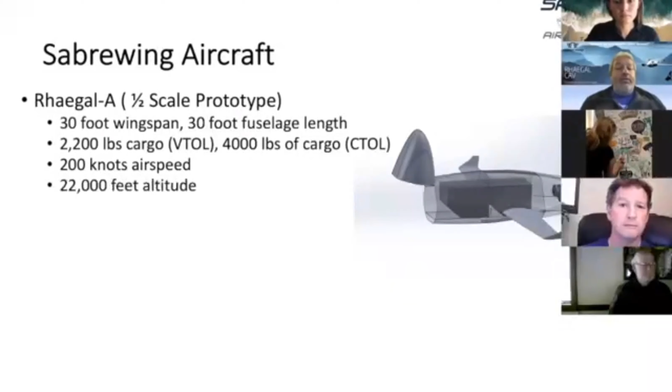I want to offer my congratulations to Dr. Roper and his team for achieving this revolutionary rapid contracting and prototyping method to bring industry and DoD together to develop this new exciting technology with both military and civilian applications.

This technology will have great benefit to the needs that we have in Alaska and the Arctic, where conventional aircraft, vehicles, and vessels oftentimes can't operate.

Agility Prime is part of our Defense Department's long history of turning futuristic ideas into reality. I'm proud that the federal government is investing in revolutionary ideas. Agility Prime is leading the way.

This launch of Agility Prime is so exciting. This technology has the potential to make vertical flight more affordable and more widely available.

And with the encouragement of the U.S. Air Force and the entire federal government, American companies employing American workers can gain a head start and win a fair share of this lucrative market.

eVTOLs have the same agile, vertical takeoff and landing capability as helicopters, but are quieter and should cost much less to operate because of their electric motors.

We are becoming a trusted innovation partner in commercial tech. I could not be prouder of this initiative. I could not be prouder of this team.

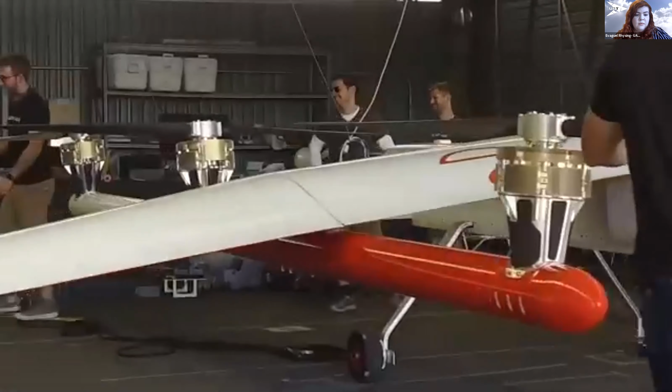And it's truly a great credit to Agility Prime. They could put on this virtual event with so many hometowns of the United States represented.

You know, industrial base is not really about just what a country can make. More than that, it's about the people who dream up what to make. And then, of course, those people who make it.

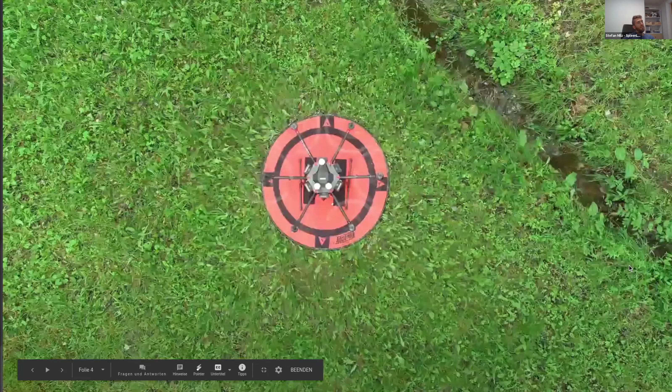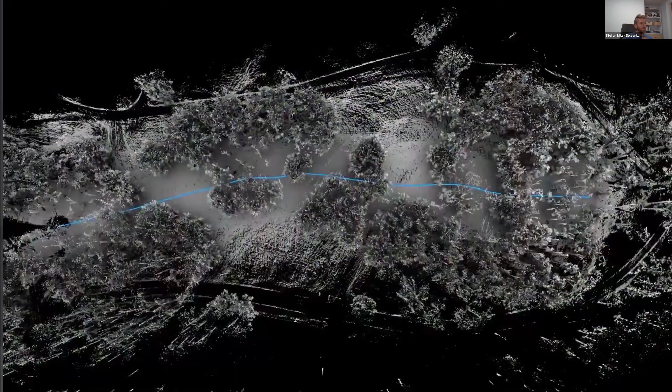So how could this look like? Let's have a look at this small video of how a drone in real time reacts to its environment, fully automated. It's done with a combination of AI and traditional deterministic algorithms, and it directly looks for a path that is not hitting an obstacle in real time. It's flying very fast, creating a map, and self-localizing without the use of GPS. This is how an AI function could look like on a drone, and it's very impressive and very accurate. At the end you see a really nice 3D map. This is just a specific function for starting into that game.

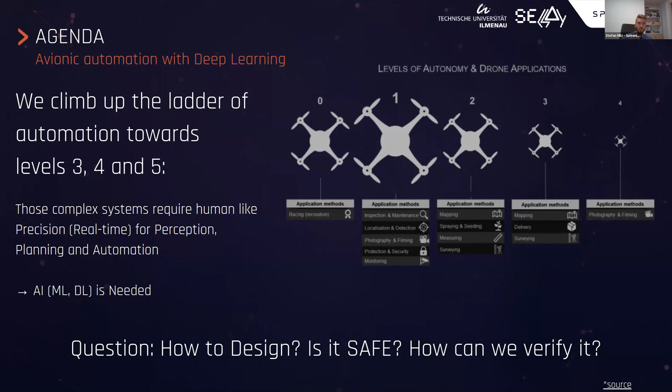So what is autonomy? We have several levels of automation, and as we climb higher, the tasks get more and more complex, so we need AI. But the main question at the moment is how can we design a system composed of functions solved with AI that is also safe? Not safe from a functional or objective point of view, but really from a point of view that covers reference standards, for example DO-178 or something like that.

Therefore we need some key assets, and I'm really confident that Spleenlab brings that asset. We need deep machine learning and autonomy know-how, and more importantly, a confident knowledge of sensors and the physics of sensors, and a safety strategy regarding the reference standards. Overall, we designed an architecture to solve the full autonomy approach, but we can also pick up single modules and bring them to the ecosystem.

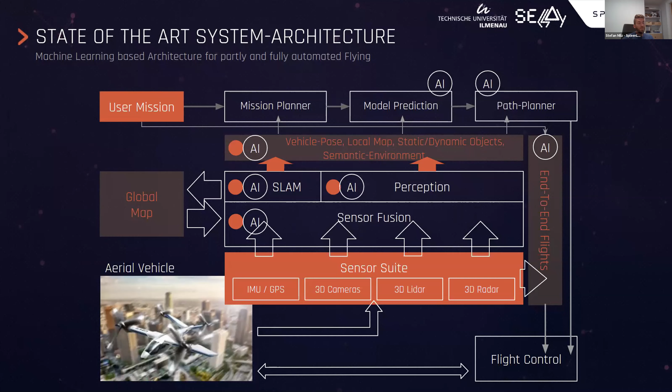At the moment, we believe in a modularized system composed of different sensors, which is really important, sensor fusion, perception, SLAM, and also model prediction, path planning, and so on. We see at the moment that perception, for example like detect and avoid, or SLAM as a GNSS-denied localization, is very interesting for the ecosystem.

So why is that safe? On one hand, the modularization keeps the single modules encapsulated. On the other hand, redundancy makes it more stable. The modularization allows us to really test modules in an encapsulated way, and this is really required by the big reference standards, as is the redundancy. This is really important to fulfill the higher automation levels.

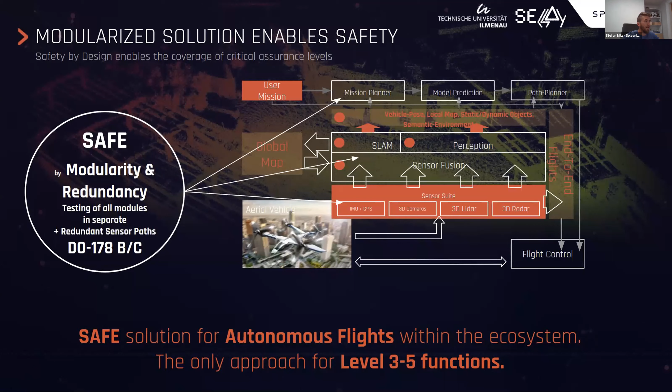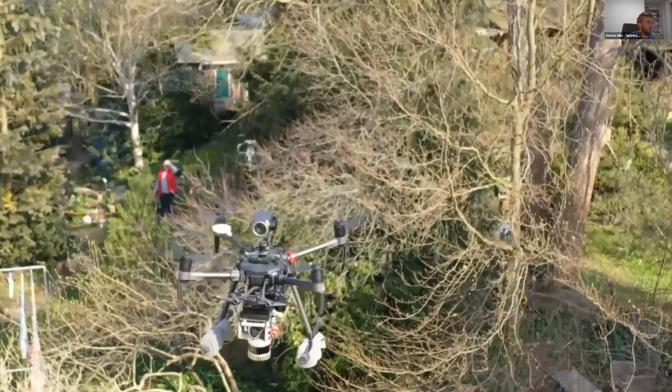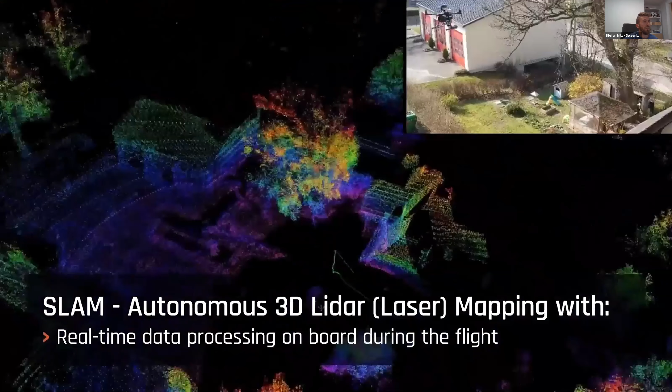It's fully GPS-free, only using its perception and mapping, the SLAM approach, and inside that module we also use some machine learning components. But this is what redundancy means. So if you have a GPS and there's a GPS-denied zone, it's always good to have redundancy, and that's important for all the functions in the full autonomy system architecture.

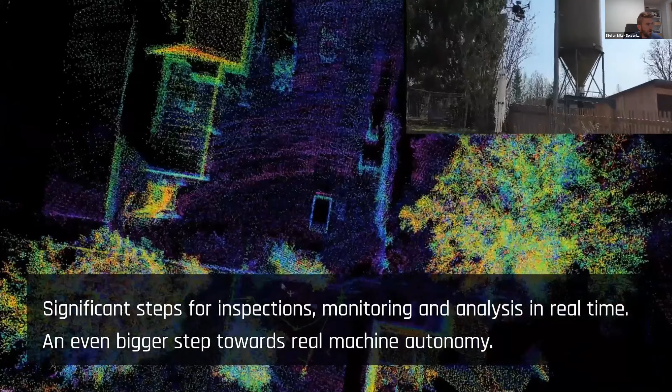And when it comes to deep learning, it's all around us, it's very famous, and everyone wants to do AI. So we have to ask ourselves: what is deep learning AI, really?

At the end, and this is really important for safety, it's a statistical procedure to solve functions. This means we don't have determinism inside. And when it comes to reference standards, they require us to provide determinism. This is really, really hard to solve.

So there are other procedures needed. You cannot put a full autonomy function only on ML at the moment; it's not possible to validate because of the huge need for data. You need a kind of safety-by-design paradigm: sensor analysis, sensor redundancy, and separation of processing chains. I want to explain this later, but first, why is sensor redundancy important?

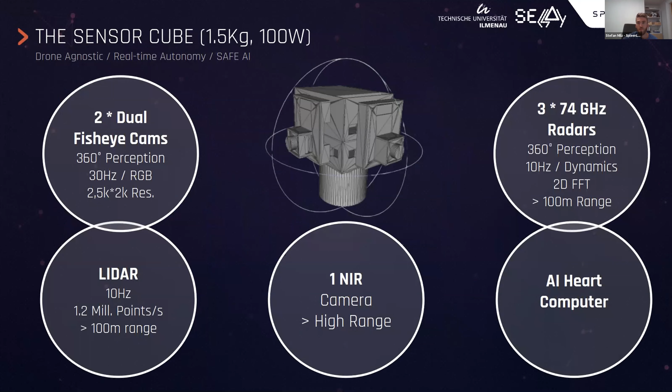And we developed a sensor cube composed of several sensors. It's low weight, with an AI computer inside, and you can plug and play it into different devices. That's how it looks, and this is how it performs.

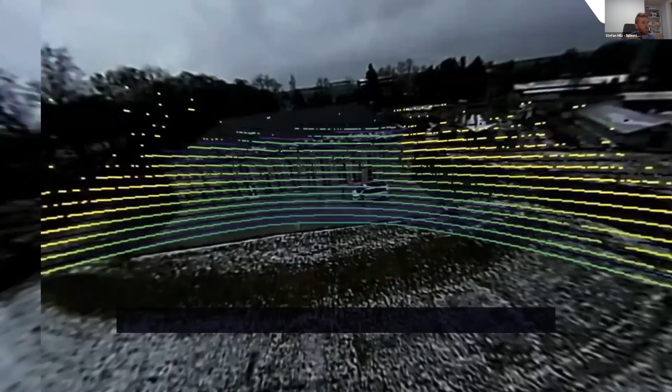So here we have environmental perception using camera vision, fully 360 degrees with dual fisheye cameras. We have the LiDAR—here it's a low resolution LiDAR, we're moving now to higher resolutions. We have the semantics, and we also have the full sensor fusion. The environmental model is then the result, with real semantics in a real-time map provided during the automated flight.

Some remarks: we also made third rank at the most important AI conference in Europe, in the Game of Drones competition, with software-in-the-loop automated flying, out of 120 competitors.

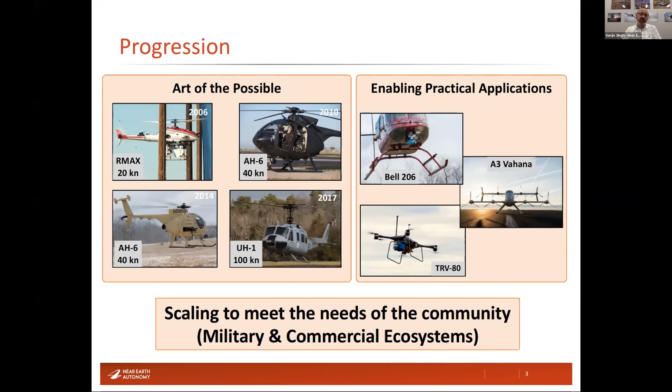I'll try to give you an example. Our current work is with Kaman Aerospace to bring autonomy to their helicopter, called the K-MAX. This is a very interesting helicopter with a long history of commercial applications, able to lift about 5,000 to 6,000 pounds at a time. It was developed initially to help in forestry applications, using a sling load to pull out very heavy objects, also used in construction of highways and other places where large members need to be installed in rugged terrain.

What we're doing is trying to see if we can use this aircraft in an autonomous fashion in a military ConOps for logistics especially. The Marines are very interested in using aircraft for transportation, and what we're looking at is all the lessons we've learned boiled down into a small package that can give this kind of aircraft situational awareness and allow it to operate in an area where all sorts of unplanned things might happen.

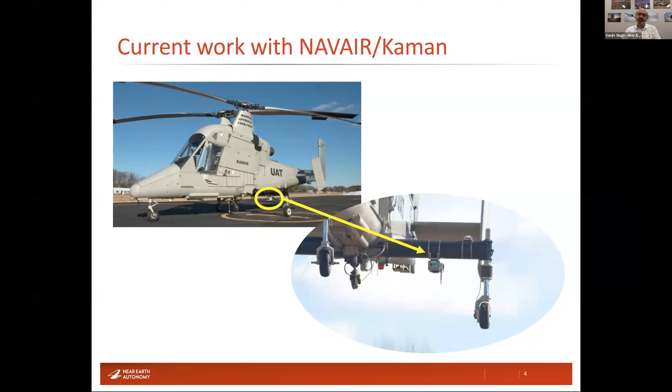We've been thinking about what we call the military ecosystem, which has to do with everything that needs to happen to fly these aircraft safely - starting even before the aircraft is up in the air, with all the mission planning that needs to happen, using information from any threat or no-fly zones that might exist, any terrain present in the area, and then the situational awareness needed to avoid static objects and flying objects. This includes being able to deal with contingencies as they come up, evaluate terrain if the vehicle is coming down in an emergency, land precisely with very lightweight infrastructure, and even land on ships.

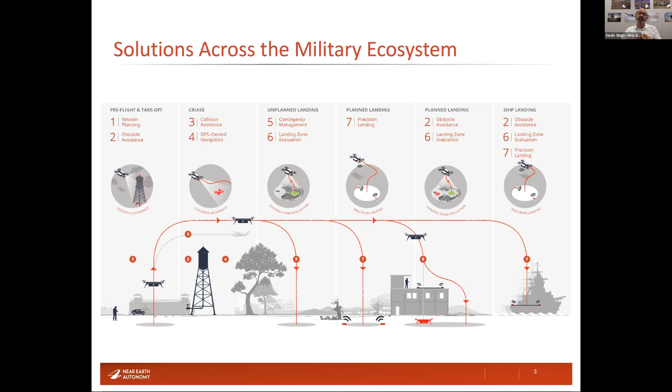I know there's a very strong case for aircraft to be able to fly from ship to shore, shore to ship, ship to ship. These are very important kinds of cases. So we're building these kinds of products and capabilities that are modular and can be put into various kinds of aircraft. We have also a very similar kind of need on the commercial side, and you can see that some of the details are different. In the commercial side, there's a more typical case of landing at a site that's been prepared for the aircraft to take off and land at.

But these aircraft have to be able to evaluate a landing site in case it's coming down in an emergency. We can't imagine that these aircraft will be perfect, or that they'll always be able to get to a prepared landing site. So if it has to come down, the idea would be that there would be a map ahead of time of all the places the vehicle could land, and then as it's coming down in real time, it would have to evaluate these landing sites to make sure it's landing safely.

And of course, just as well as in the military case, the commercial case also needs immunity to GPS dropout, jamming, or any of these other kinds of things. These are very different kinds of ConOps, but what we'd like to suggest is that there are some common needs that can be exploited across both military and commercial use cases.

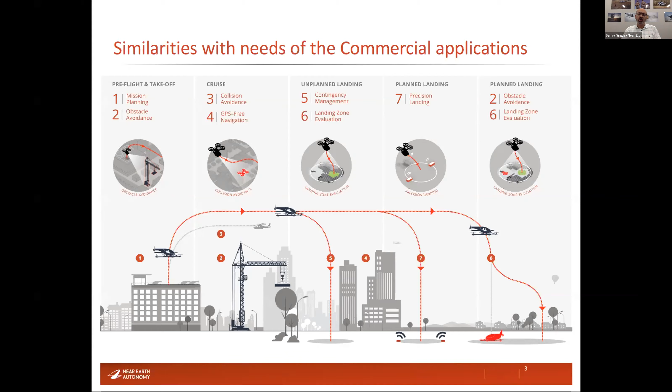So I'm going to stop here. That's my contact, sanjeev@nearearth.aero, and if we have a couple of minutes before time for others, happy to talk about this and anything else, especially if there are questions about the smaller scale, like the aircraft flying between the trees that Stefan showed.

Yeah, for sure, Sanjiv. Thanks for the presentation, a great overview. Leaning back on a previous presentation, can you speak a little bit on the difference in systems between something for a full-scale helicopter like the Cayman and something like a small drone? I know the weight fraction that the systems take up is much different, so maybe there's more opportunity for a larger airframe, but also more complication.

Yes, when you're flying on a full-scale aircraft like a full-scale helicopter, you're looking at the top speeds, and the flight profiles are quite different than what you would fly at a smaller scale. At a smaller scale, high speed might be 10 meters per second. Now that's very fast - that drone that Stefan showed flying through the forest is flying at 20 knots, and that's really fast when you're flying a few inches away. So all of what you need to do is make sure the vehicle stays safe.

Now, at full scale, if you're flying at 90 or 100 knots, which is a typical speed for a helicopter, you have to be able to look out further, and the approach angles are going to be very different. The takeoff procedures, when dealing with something like a full-scale helicopter, the flight dynamics are very different. A multi-rotor system has the ability to come down steeper glide slopes, but for a typical helicopter, we'll want shallower glide slopes, and that changes the perception system. Of course, larger systems are able to carry a larger payload with longer range LiDAR.

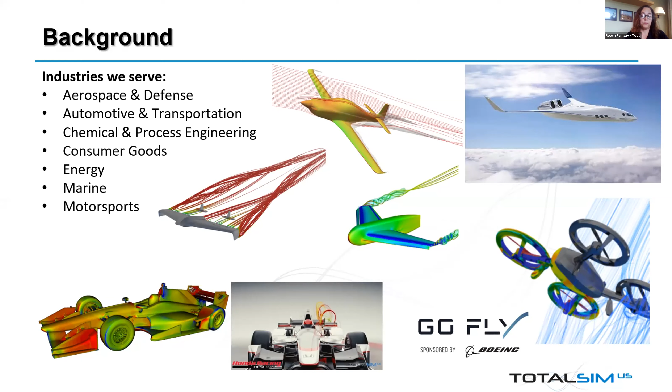Usually when people think of CFD, they focus on the solve part. However, there are many steps to get to the results you need. You need to prepare your geometry, create a volume mesh, then you get to solve, and then you need to post-process all the results so that you can actually review them and make changes depending on those results. In some cases, you'll go into shape optimization.

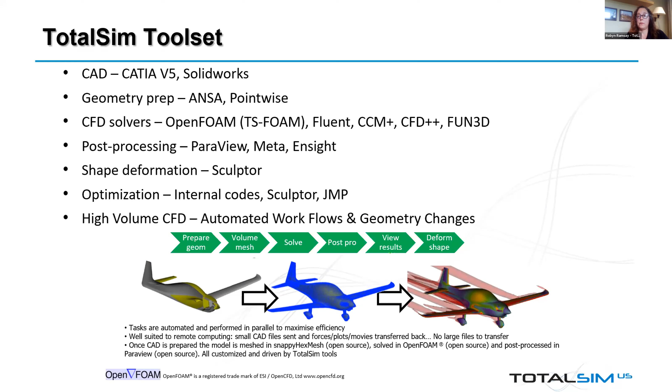Quality mesh prep is always important for obtaining quality CFD results. So ANSA, Star CCM Plus meshing, and Pointwise are the meshing tools that we tend to use in aerospace applications. What we like about them is that they can be interactive if needed, but they can also be scripted to allow for automation of more standard cases.

Some factors we think about when we are meshing are things like appropriate spacing near the wall, because it's needed if you want to resolve features like the location of boundary layer transition from laminar to turbulent or anything like that. You'll also want a high overall cell quality, and we'll probably need some refinement in areas where there'll be flow features that affect the overall lift and drag or performance of your aircraft or vehicle.

Our meshes are most often a hybrid mesh, of structured and unstructured cells. We also do modular volume meshing, and this method allows us to swap out parts without having to regenerate the entire volume mesh. It's a time savings for us.

So for example, if you have a flap or some other device that you want to try different versions of, then we would section off that part of the volume mesh so that we can just exchange that area of the mesh with the new part.

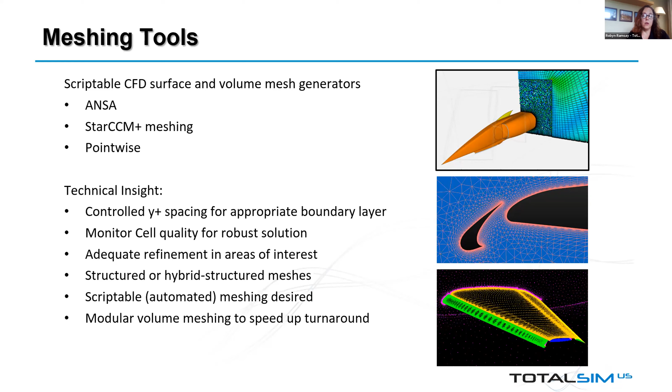The solvers that we currently use most are OpenFoam, and we like OpenFoam because it's open source, and we can pass any savings on to our customers. But often we're using Star CCM Plus for aerospace projects, as it has some additional features over OpenFoam, and it's well known and trusted in the aerospace market.

Sometimes we use FUN3D, which is also well known as the NASA code. In all of these codes, correlation is super important to us. So we often participate in correlation studies like the NASA-sponsored high lift prediction and drag prediction workshops, just to keep us connected to the state of the art.

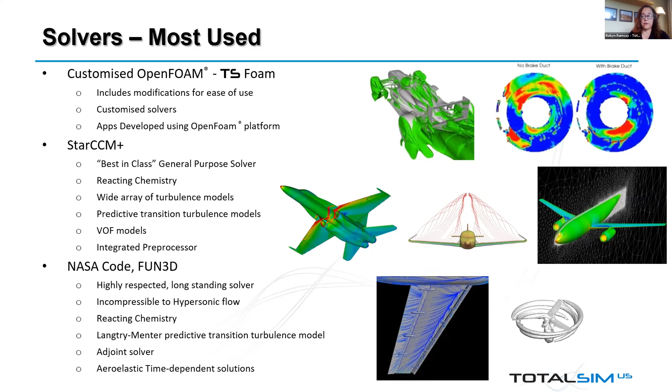Recently, we've been working with a client in eVTOL and have been refining our propeller simulation methods. What we found as a sponsor of GoFly is that often the external aerodynamics are the main focus by the teams, whereas the propeller is often taken off the shelf without a lot of analysis.

For a first order design, this will work for you. But as development continues on your vehicle, you'll probably want to do a higher order analysis where you can evaluate the propellers specifically and make sure they're delivering the thrust that you want.

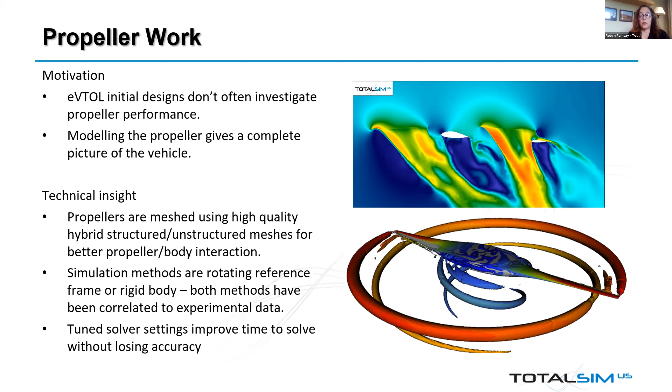As I've mentioned, automation is super important to us, and it's something that we do a lot of. We are always looking for ways to automate a process to improve our accuracy and save time. We do it for simulation setup as well as simulation post-processing. Automating allows you to spend less time manually creating plots and images of your results and more time analyzing your results, which in the end leads to better design.

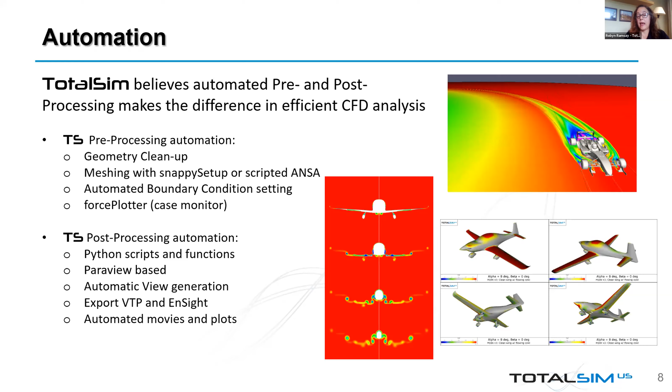In the Go Fly competition, we were super happy. Team Tetra was one of the winners in the February 2020 fly-off, and they used our TS Aero app. All these apps are developed for non-expert users and give advanced simulation results, and are priced on a run-by-run basis. This allows you to obtain quality CFD results without having to create an entire CFD department and incur the costs associated with that.

TotalSim has the ability to help no matter if you're just starting on the journey or if you're well into your development phase. The TS Aero app would allow for quick analysis of a single design, or if you're looking for more detailed analysis, TotalSim's experience in consulting services might be an option for you. My contact information is down on the bottom right. You can contact me through Ramsay at totalsim.us, or you can contact us through the TotalSim website at totalsim.com.

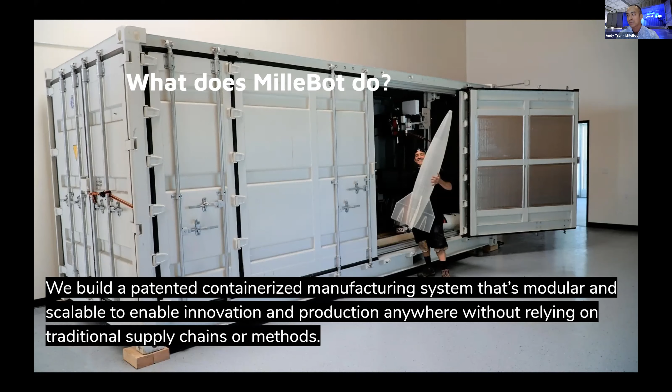So this is our MilleBot system - it's a turnkey system. This is not a render. Everything inside the machine is off the shelf, which means everything is modular. You can swap tools, upgrade your machine.

As the technology becomes better, as the hardware becomes better, as our OEM suppliers become better, we can upgrade the machines and give our customers enhanced capabilities so they can start producing with the latest technology - the greatest efficiencies. We have an onboard computer, which could be mounted to the system itself, or it can be controlled remotely through a hub or some sort of interface.

This is also the largest build volume per cost on the market. We've done our comparisons, and I'll go over an example with you later in the slides, how our machines are about 1/8 of the closest competition.

And of course, it is a mobile platform, which is very unique. That means you can deploy your manufacturing anywhere. So if your facilities are maybe in an area of wildfires, like right now in California, it's possible to relocate your facility to the next location or a different location that's safer so you can continue production, or maybe take it off site, to some stealth environment. So it's a very discreet platform.

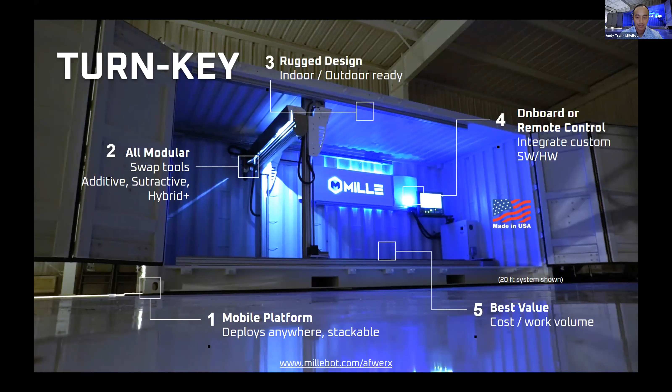So I'm sure you've seen this before, the shipping container - they're everywhere. If you have an independent testing facility or production facility, you can easily move your machines there. We have many configurations available, including 3D printers, 3-axis CNC routers, 5-axis routers, laser, plasma, water jets, 3D scanners, and more.

We're just going over a singular system now, but of course, as a company or organization scales using this platform, you can see the cost advantages - in one space, this is a 20-foot container you're looking at, 160 square feet of ground space, but if you can stack 6 units on top of each other, that's 6x production capacity in 1x production space.

So in the grand scheme of things, if you're lacking in space, a system like this will make a lot of sense. If you're designing for the factory, or if you can improve the factory, and you design around that, that's where I believe you can gain the most efficiencies, right?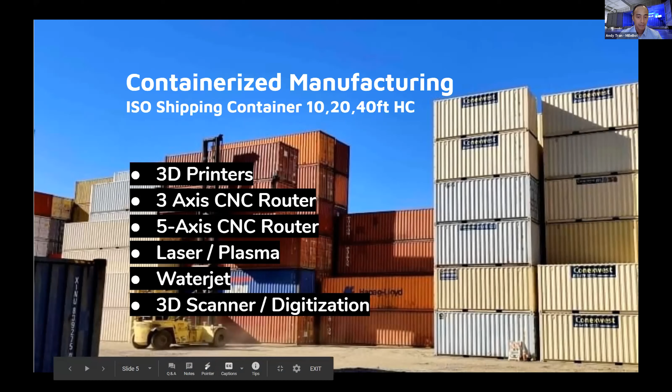So this all started with a vision. In 2011, I got into 3D printing. I thought it was the greatest thing ever, but I did realize there were some challenges with size, speed, and materials. In 2015, I had an epiphany, and that was combining the shipping container with 3D printing to create a large format system that I could produce and create these ideas that I'm sure one day I'd have. So that was the vision there.

So we built a solution, delivered in about 3 months. This is a commercial ready solution, and they're able to trim the carbon fiber skins for their aircraft. In addition to that, they're able to trim wings on the machine as well. So this machine serves multiple purposes.

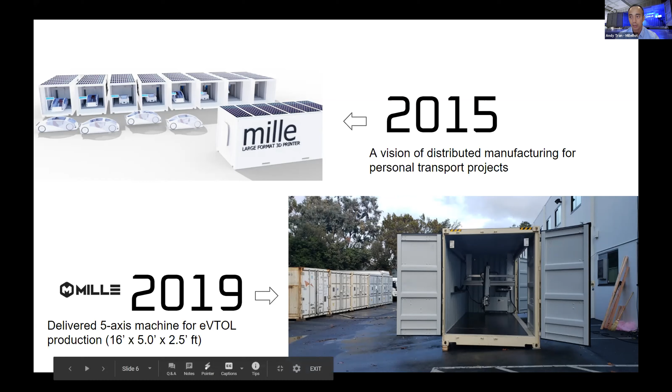And that's a small part—we can obviously produce much larger parts. On this 20-foot machine, you're looking at a build volume of 10 feet by 5.5 feet by 5 feet, and on a 40-foot system, that would go up about 2.5 times.

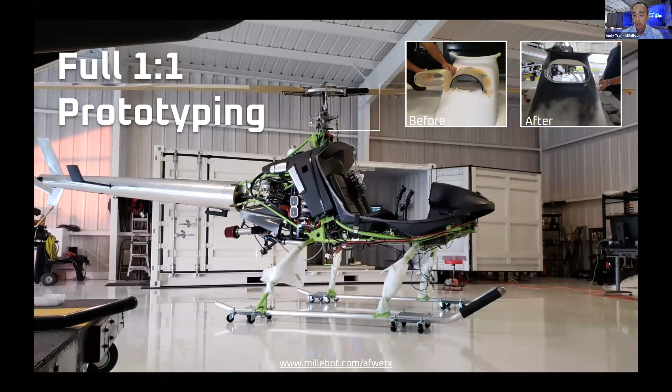But we've been able to reduce that down to about 8 minutes automatically using our system. In the same machine, we're able to trim 2 full wing structures simultaneously, measuring over 14.5 feet long by 2.5 feet, including drilling holes and creating cutouts for wiring and motors. This ultimately helps the company reduce time and cost of producing aircraft, so they can test, validate, and get to market faster.

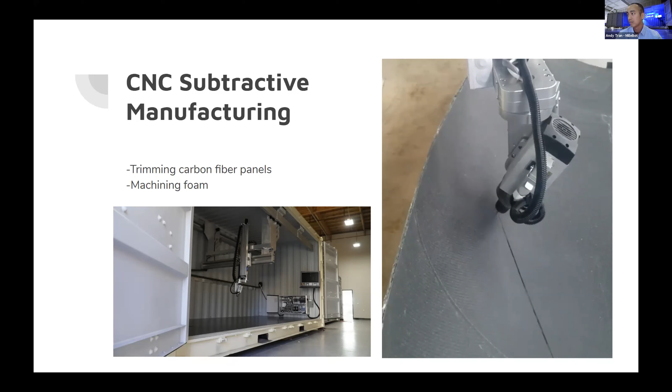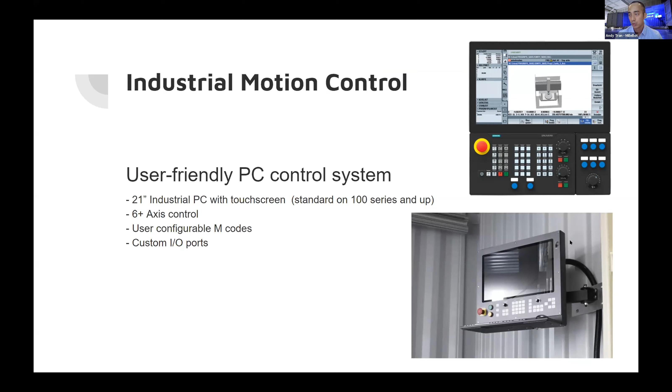We're always adding new OEMs to enhance our product line and give our customers more access and more options.

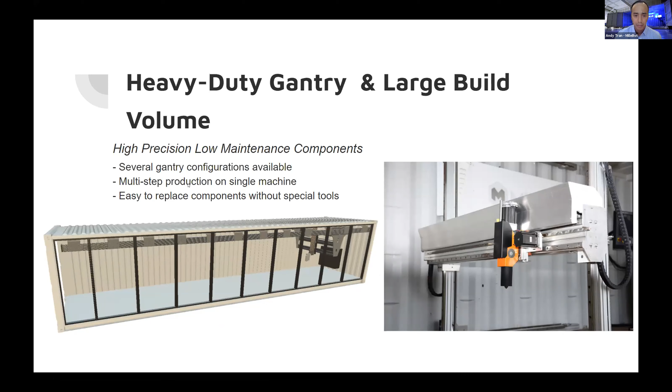This is an image of our 40-foot system on the left—what we call our 300 series, the heavy duty. It has a glass window in front so you can still see what's happening inside. On the right is a machine we have now, so you can see the components. It uses really heavy duty linear guides and ball bearing ball screws. Some of the wear and tear parts, like a bearing block, will last 10,000 kilometers and it's under $100 to replace. So very low maintenance, very heavy duty.

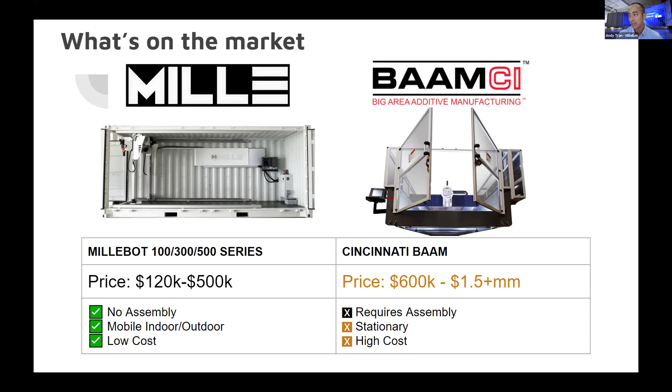On the next slide, this is a competitor's product—it's well over $1 million, plus it requires a stationary facility. Whereas a Millebot with a comparable build volume, we're looking at under $500,000, but really our 3D printers start at around 120 to 180,000. No assembly required, indoor or outdoor production, low cost, which means higher ROI and shorter time. We like to say agility, not facility.

In terms of materials, I'm sure you have questions about this on the 3D printing side. We are open source when it comes to materials, using off-the-shelf extruder systems. For example, the ones used at Oak Ridge National Lab that printed the Shelby Cobra—we can actually use that tool head, we've already spoken to the manufacturers, and it's compatible with our systems. Any other OEMs emerging or out there on the market, we can usually integrate into the Millebot platform to give you what you want.

So if you have any questions regarding any of our products—we don't build the aircrafts, but we help you build the machines that help you build the aircrafts.

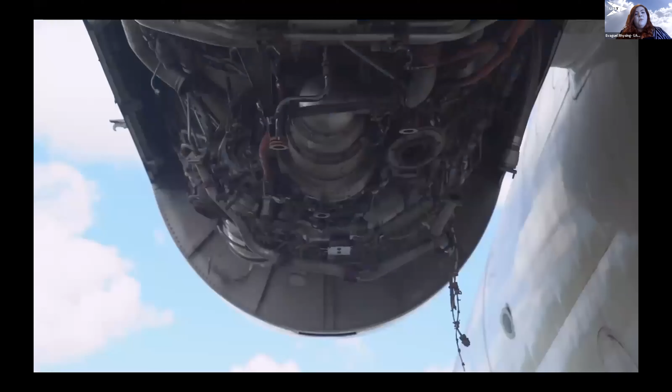Right now, as you can see, this is what mechanics have to see. They don't know what's behind the panels. And once they take off the panels, they have all this complexity. The red bands are metal clamps used today, different connectors and wiring. Of course, eVTOLs don't have this level of complexity, but they still have wiring and high voltage wire.

And the way they do maintenance is mostly visual inspection and locationing and actual physical inspection because there's so much. But this leads to human error because some things are not visible to the naked eye, and we're humans, we make mistakes. So what if we gave them the tools to be able to avoid this?

Now with UAT, this is an actual data set sample that we have from a temperature problem. With UAT, the mechanic now, instead of having to take all those panels and all that extra work, can use our platforms and augmented reality to be able to go inside and be able to monitor.

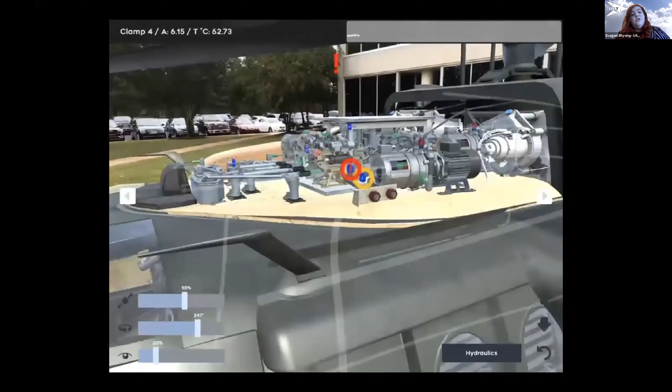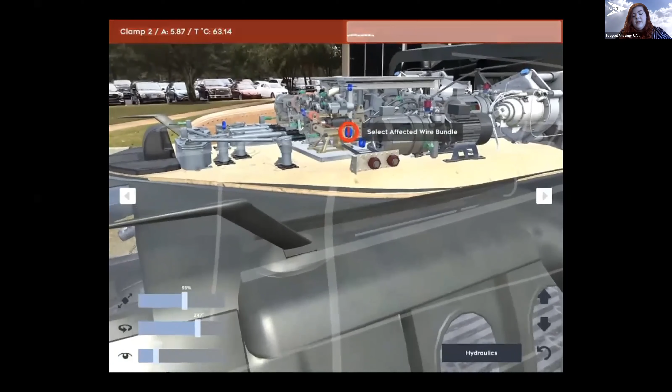In this case, the mechanic can see that it's a temperature problem, and it's not only telling you, hey, this is what's the problem, it's telling you where in the whole system it is and which wire it is, helping improve the process. Now the mechanic can make a very informed decision, go where it needs to go, fix it, and do the necessary steps to be able to avoid the problem.

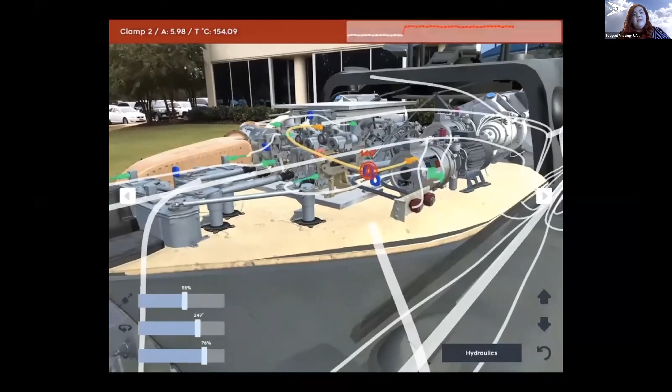And with all this data that they have, it will be able to tell you, you have X amount of time left before it becomes a real issue. So it provides an opportunity to do condition-based maintenance.

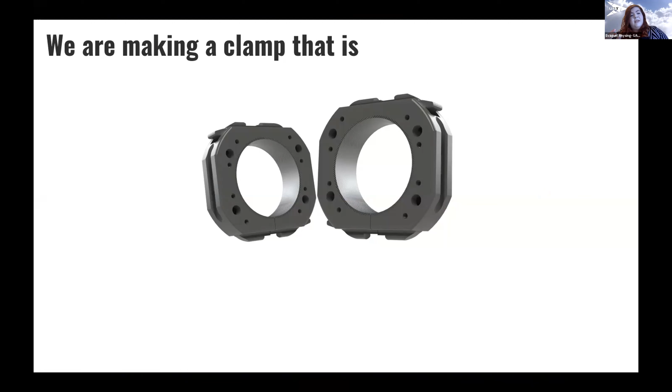So how are we doing this? We're doing this by replacing the metal clamp that most aerospace use today with a lightweight thermoplastic clamp that is faster, lighter, cheaper, smart, because it has a network of sensors embedded in it. As the first presenter said, that's made a good point for it. It has a complete set of sensors that help monitor and remove the redundancy for the electrical systems. And it uses augmented reality and artificial intelligence to do so.

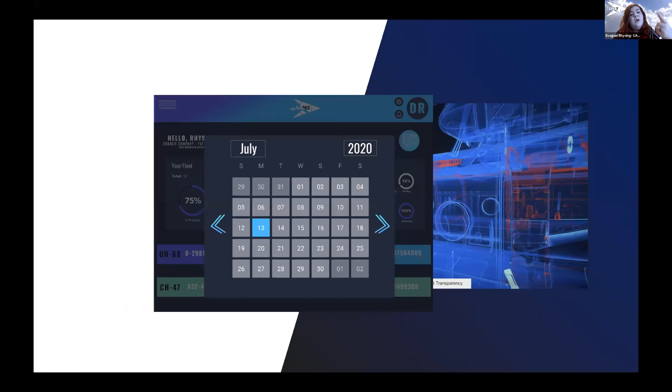And with this, what is helping it do, our system is not only, you can search by date, you can also search by timestamp, helping you make informed decisions and avoid maintenance that, if you have to do it, take from days down to hours or from hours down to minutes, because currently there's nothing out there that easily in situ will be able to tell you where a fault is located.

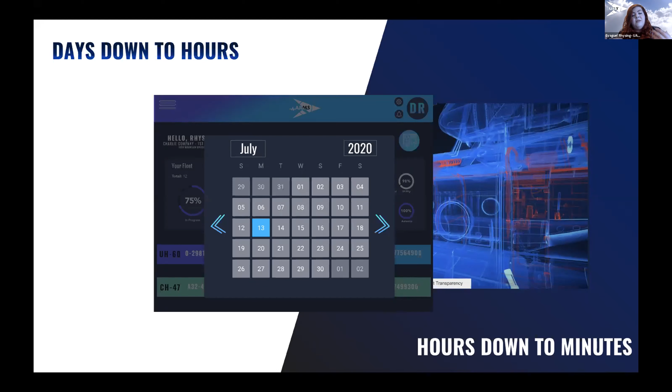And with us, as we explore the eVTOL market and as we continue to grow and all these amazing manufacturers create their models, and as they begin to age, we're going to learn a lot more about that wiring system, and having access to this data and the tools to analyze it, they'll be able to reiterate and improve upon their designs. And that's where we come in.

And not only that, of course, by monitoring as well. So a use case scenario is, here we install our clamp, we connect it to our software, and then we set out their threshold, meaning if you flip a switch off or you flip it on, it will not pick up any discrepancies. It will have a threshold.

And then after that, it is connected with a unique identifier on a one-way ask-receive basis. And what happens is you turn it on. When we turn it on, it's working.

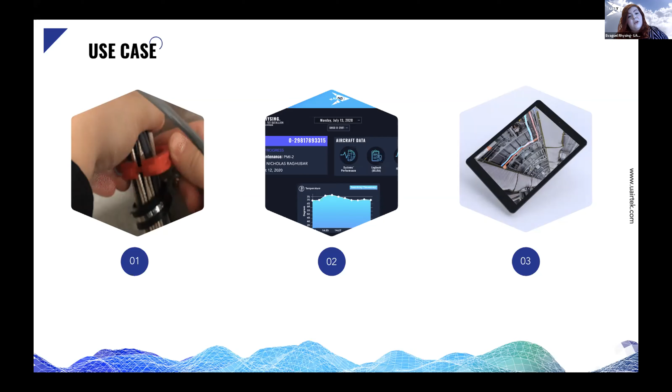Everything's fine. Visually we see nothing's happening, but our clamp picked up a problem. The problem picked up is a loss of amperage, but the system is still on because amperage is still flowing enough to turn it on, just not at full capacity. Because we can't see it, with the constant vibration of this aircraft, the wire shaved. If we do not pick it up early enough, this chafing will eventually lead to loss of power or other complications. But our clamp can help you avoid those.

And this is based on personal experience. Darian, the guy right in the middle, was an aircraft electrician for the US Army with over 12 years of experience in this field. He worked with these systems, understood the problem of troubleshooting them, until he got injured because of the metal clamps. This led to him losing his job, his home, everything. Then he created the ICC and created a solution.

Together with Donnie, we came together with him and created UAT. Donnie is a US Army captain, retired, with over 20 years of experience in technology development, and I myself have experience with business-to-government and business-to-business development for over 10 years.

So what does this mean for the eVTOL? Here you have this beautiful aircraft we've all seen for Agility Prime, built wonderfully. But once you put the panels in, some areas can be hard to access, and taking them off is very time consuming. As the aircraft continues flying and aging, this maintenance is going to become more difficult. But having eyes on board, you'll be able to tell, 'Hey, this seems to not be performing as it's supposed to,' and know exactly where to go instead of having to take everything off.

To give a little company overview, we have a manufacturing facility. We're ISO 9000 compliant. We've worked with the DoD before, with very experienced teams that have done projects for the Department of Defense, and we have the capability of producing over 1 million units per month.

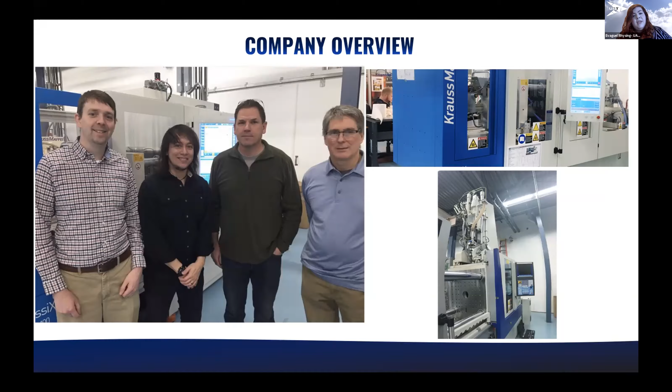On the development side, our team is aerospace focused, led by Gerardo. He was a prior senior engineer for electronic development and manufacturing at IBM, with over 20 years of experience, all the way to an AR lead who worked for NASA on development projects.

Our current status: the base model has passed testing based on mil spec, mil standards, so it's ready to go. On our sensing clamp, we've developed all the sensors, and currently we're putting them into a smaller printed circuit board so we can automate our manufacturing process, produce more efficiently, and start using them for larger scale testing and implementation.

So why are we here? We're here because we believe in what Agility Prime is doing and what all the manufacturers are doing. We believe urban mobility is the next step for human and urban transportation. We want to work with the manufacturers and help them through the design stage. Because of our open and integratable system, you can either use our UI/UX, or we can just give you the backend support. Because of our modular system, we can adapt to what each specific manufacturer needs. We'd like to continue working with them and with the Air Force and Agility Prime, as we have in the past, and keep moving forward.

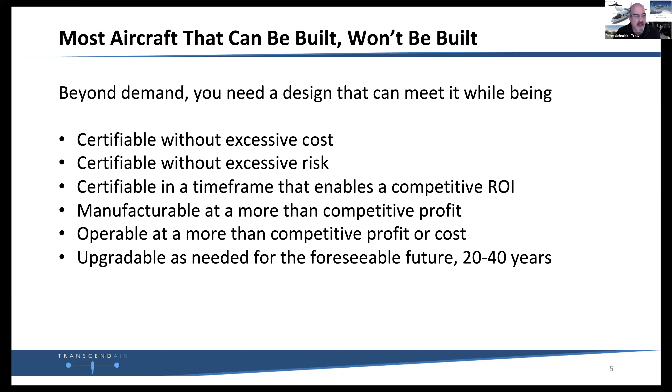Because beyond demand to bring an aircraft to market, you need a design that can meet it while being certifiable without excessive cost, certifiable without excessive risk, certifiable in a time frame that enables a competitive return on investment, manufacturable at a more than competitive profit, or why would anybody want to build your aircraft instead of other things, operable at a more than competitive profit or cost to private owners, and upgradable as needed for the foreseeable future, which for an aircraft is 20 to 40 years.

It's hard. Worse yet, most aircraft that are certified profit someone else, if at all. And that's because if you're applying new technology to a new aircraft, that takes time and effort to get right. And that extra time and effort adds cost, it adds risk, and it impacts the ROI timelines. And so all of that is a negative, and it's one of the reasons why it's so hard to bring new aircraft to market.

So the next question we asked ourselves is, what if you don't want to go bankrupt and let someone else make all the money off your aircraft? So the answer we came up with is target already proven markets with a low risk, high technology readiness level design. That's our approach at Transcend.

So we've designed an aircraft that will fill two proven market needs - that's for VIP helicopters and regional airline service. It's manufacturable and certifiable today under current rules. It will be profitable for the manufacturer, which won't be us. We're going to run the airline. It's going to be profitable for the operator - that will be us. Should be liked and trusted by passengers, of course. And it has to enable lower prices for aircraft and fares.

And what Greg and I bring to this is an outsider's perspective, if you will. Greg really sort of brings the passenger's perspective, and I bring the Part 135 air carrier perspective. And I'll tell you, until I got into trying to make money with aircraft at this scale, I had a lot of false notions about how people think about and buy air travel. And I systematically disproved those notions over 5 years of attempts at Linear Air. We've brought that directly into the design of our business model as well as the aircraft.

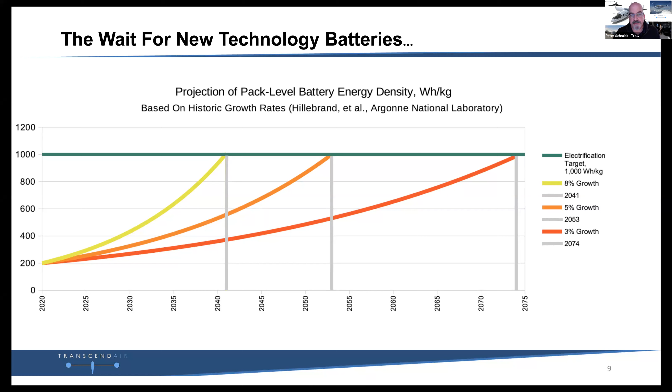I reckon today we're at about 200 watt hours per kilogram on a pack level, certifiable pack level basis. Pack level means with all the cooling, all of the shielding, all of the controls and everything necessary for safe operation in a certified aircraft. So if we progress at 8% per year, then we'll achieve 1,000 watt hours per kilogram, which is what our aircraft needs, in approximately 2041. So that's an issue. Now, if it takes longer than that, of course, it's much longer.

The opportunity cost of waiting that long is really high. So our approach is: the Vy 400, our aircraft, make money now and electrify the aircraft later. We've cleverly designed the aircraft so we can replace the jet engine and fuel tank with electric motors and batteries in the same locations, electrifying fielded aircraft using a supplementary type certificate once batteries get good enough. If that happens faster than these graphs suggest, great, we'll electrify sooner.

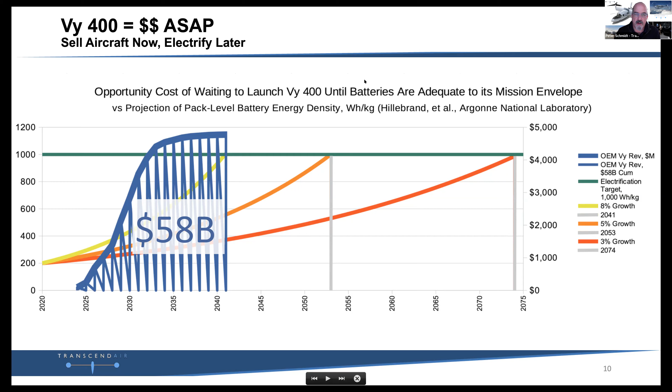That's perhaps a little bit of a controversial take in this world of eVTOLs, but as I said, we're a VTOL now and E later.

So why do we think our program is going to succeed? We're going after three markets, two of which are already proven. People buy helicopters today, about $4.5 billion a year, used for VIP transport. In addition, targeting regional airline service with our aircraft, we can offer cheaper door-to-door service than current Uber plus airline plus Uber costs by using VTOL. That generates an additional potential $9.6 billion a year in aircraft sales. Then there are military applications, which we've only started to think about, primarily because of AFWERX. Fortunately for us, the VIP market alone has the demand we need for our program.

Why would people buy our aircraft instead of a helicopter? Well, it's 24 times better: half the price, 3 times as fast, and a quarter of the operating cost per mile of a medium twin helicopter like an S-76 or Leonardo AW139. We really think of this as the world's fastest and most cost-effective helicopter. It's faster than turboprops and looks like one in airplane mode, but it doesn't have the range, so it doesn't compete effectively with fixed-wing turboprops. But it does have the range of a helicopter.

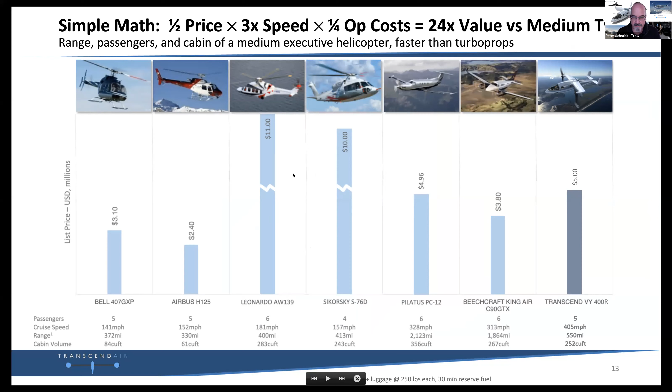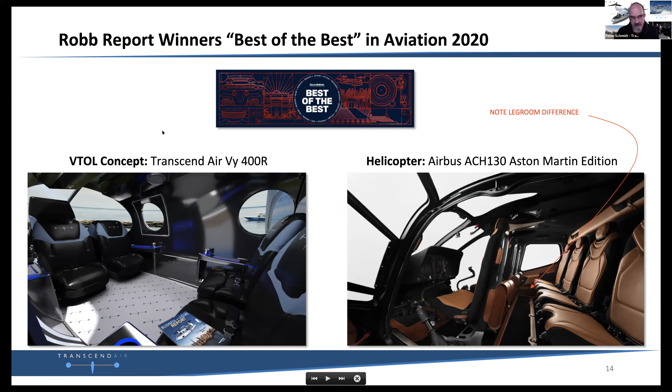A lot of people look at our aircraft and say, oh, tilt rotors, it's another tilt rotor like the V-22, that's really expensive and complicated. Well, it's not a tilt rotor, it's a tilt wing, and we don't use rotor heads. We use variable pitch propellers with collective in helicopter parlance, but no cyclic. Our motto is just say no to rotor heads. If you look at how complicated a rotor head is, they're amazing mechanical engineering marvels, and I'm in awe of the engineering prowess that Bell and others have developed. We're not doing that - we're going much simpler, with the same kind of propellers a King Air has. The result of that simplicity is much lower cost.

These aircraft are shown to scale, so you can see the Vy is much smaller than a V-22. It's coming in at $3.5 million in airliner trim versus $71 million for the V-22, and $24 million for the civil derivative, the AW609. The fundamental reason for that is just less complexity - it takes cost out throughout the entire lifespan of the program.

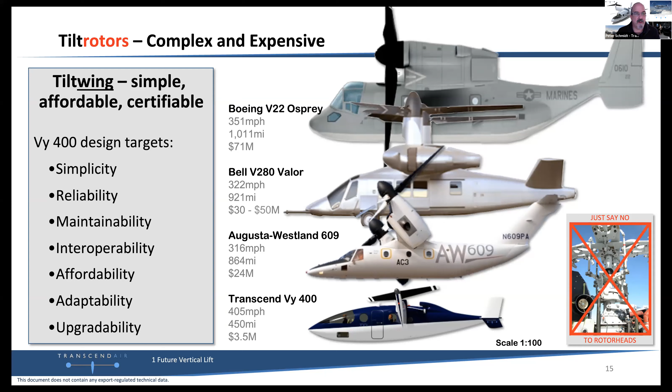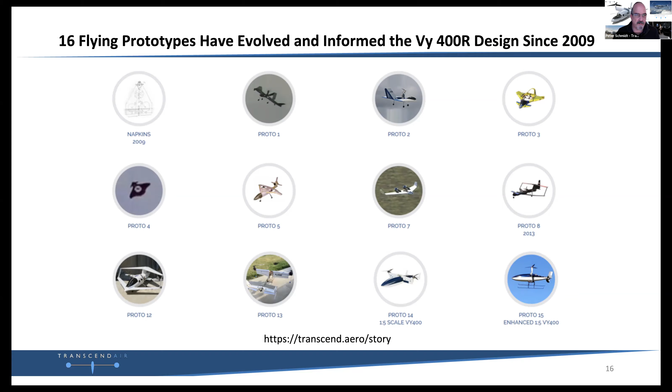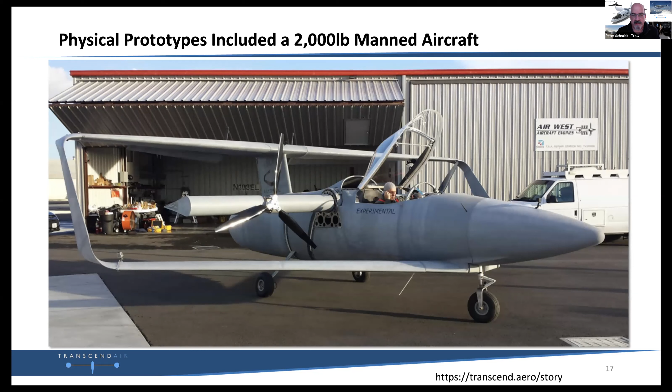We're not just about pretty renders. The lineage of our aircraft includes 16 flying prototypes that have informed the design since 2009. We've tried flying a lot of different VTOL configurations, and most of them don't work very well, so we're happy to have that experience that got us to the tilt wing configuration we're flying. One of the aircraft we built was a 2,000-pound manned aircraft, which was a really good lesson in flight test, safety, and building larger vehicles. That one wasn't electric - it had a supercharged Hayabusa motorcycle engine.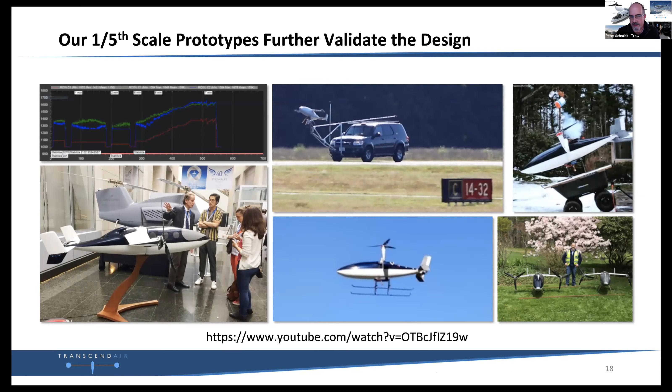We're currently flying a couple of 1/5 scale prototypes to further validate our design, acting as flight dynamics and flight control system laboratories that support our other analysis and simulation methods. So the Vy 400 has proven technology put together in a new way to create a disruptive aircraft. Some of the other specs: it's very fast - this is not an orb floating from building to building, this is a bullet going 352 knots, over 400 miles an hour, from city to city regionally.

It'll climb at 4,700 feet per minute plus in helicopter mode. That's 3 times faster than fully loaded twin helicopters can go. It'll climb at over 8,000 feet per minute in airplane mode. It's fuel efficient. It uses half the fuel per mile or kilometer of an OH-58D, the Kiowa Warrior.

It's very simple. This is part of the lack of complexity. We don't have any hydraulics. It is all fly-by-wire. I talked about it being tilt wing, not tilt rotor, and it has one single turbine engine, which we can do because it also has a whole airframe parachute.

Affordable, 3.5 million airliner trim. Effective. Sanjeev mentioned the autonomous command K-MAX helicopter that they're working on. That's had great success with the Marines. If you run the numbers, an autonomous Vy can deliver about 33% more cargo per hour than a KMAX can. So that's speed versus slung payload. And as I mentioned, it's future-proof. It's turbine mechanical to start, but the fleet is field convertible to electric.

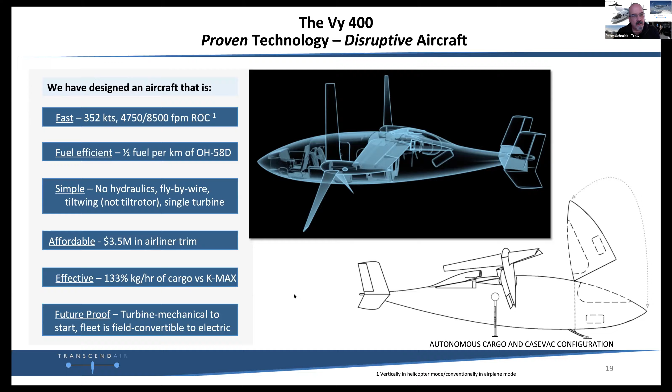So the summary here is VTOL now, E when batteries are ready, and we look forward to that great and glorious day. And I look forward to seeing it in Air Force low-vis gray at some point too. So with that, I'll pause in the presentation, just to see if there are any questions.

Yeah, for sure, Peter. I know we're coming to the end of the webinar here, so I'm going to move us along quickly, but thanks for coming on. Always great to hear from you, and best of luck with your continued progress there. Oh, my pleasure, Sterling. Thank you.

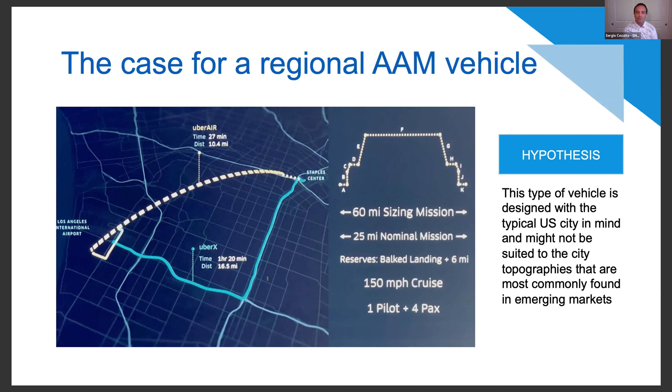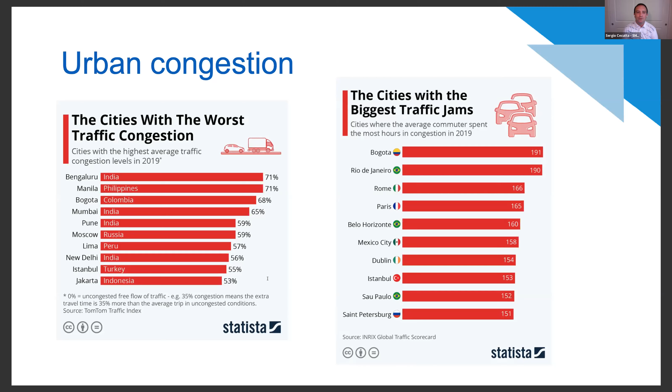When we think about the US, if you were to design a vehicle with a 6 mile range in Los Angeles, you would have a vehicle that basically doesn't even serve 1/10th of LA County, or maybe 1/20th of LA County. If you look at 25 miles, now you begin to have a vehicle with the range to serve the entire Southern California region.